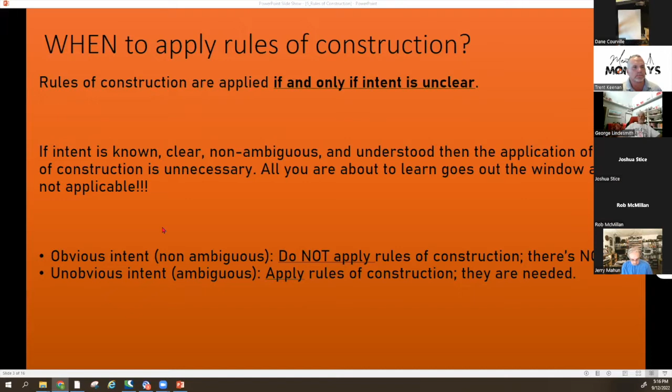Okay, so let's get into what ambiguities are. Ambiguities are something that will cloud that intent. That's what presents its ugly head whenever you're reading a deed, and you have to decipher and make your decision on what the hell they meant by that. What did they mean by John Smith's rock wall? What did they mean by Henderson Creek? Did they mean the center line of Henderson Creek? Did they mean the edge of Henderson Creek? Did they mean Henderson Creek in 1953, or Henderson Creek in 2022? There's all kinds of situations where you can second guess yourself. You don't really know the intent of that original surveyor or the landowner trying to transfer that land.

The two types of ambiguity are latent ambiguity and patent ambiguity. Patent ambiguity, the way I remember this, because I could never remember it, the letter P in patent should also jog your memory for print. So patent and print, P and P. So patent ambiguity is whenever you're reading that deed, the ambiguity is depicted right on the face of the deed. Just by reading the print of that deed, you know the ambiguity is involved.

An example of that is if you're reading metes and bounds and it says north 30 degrees, 25 seconds north, a distance of 223 feet, this is obviously not right. You cannot go north-north. You can either go northeast or northwest. Whoever wrote that deed wrote the word north twice. They should have written east or west. So now do we go north 30 degrees east or north 30 degrees west? You got to try both out, see how the deed closes, see which one makes more sense. You're trying to figure out the original intent. So that's a patent ambiguity. It's obvious, right in the print of the deed.

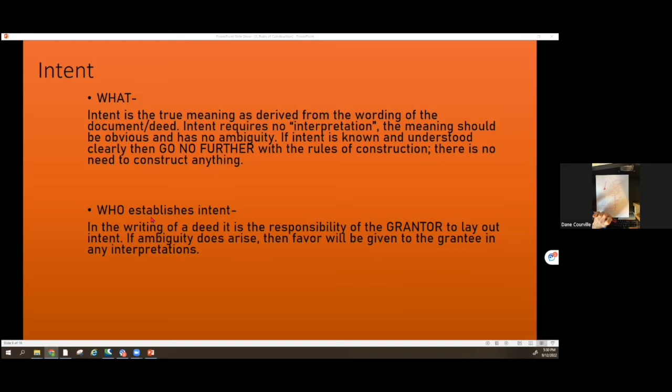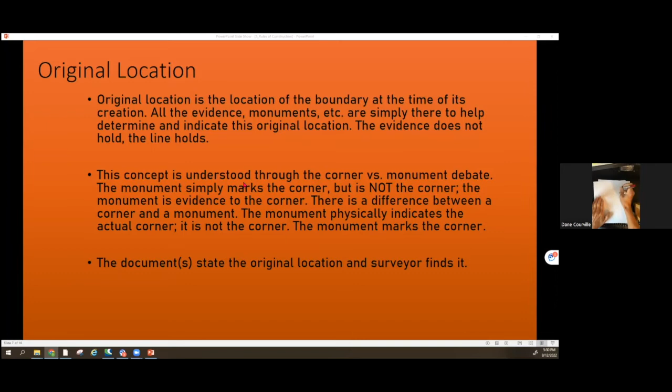Okay. All right. Original location. Original location is the location of the boundary at the time of its creation. So we have a parcel of land, big, huge ranch. Okay. And monuments were set back in 1853 by the original survey. Okay. And then over the course of time, that ranch gets divided up, sold to the heirs, all kinds of stuff's going to happen. Subdivisions are going to be made.

But at the end of the day, those original monuments that were set, they're going to dictate everything within this larger ranch. And it's going to keep getting smaller and more divided. Every time it gets divided, there's going to be a new original monument. Every time a pin is set or a piece of land is cut apart, anytime there's a new parcel involved, there's going to be some new pins put in the ground. Those pins are going to be noting a property corner. And when those corners are set, that's going to be the original location for this new parcel.

Okay. And it's your job as a surveyor to go out and build that back in. And that's what's meant by the intent. You know, the original intent was to have this large ranch and then to sell off the south 20 acres of the east 35 acres or whatever it is in the deed. Okay.

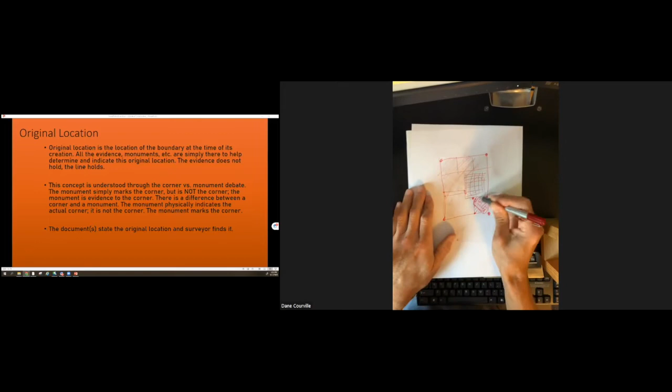Statute of frauds. So that's what the judge and the lawyers are going to lean on solely whenever they're trying to recreate the picture of how this parcel was generated. They're going to go back and look at all those written documents, whether it be map form, legal description form, whatever it may be. Okay.

But in those documents, they're searching for the intent, and the intent is going to dictate that original location. Okay. So if you go back to here, really, if you're relying on area, you're going to have to build the measurements back in to recreate that area. And to get the measurements in, you might have to go get monuments outside of where you are or something.

But at the end of the day, if you're way down here on the hierarchical list, you're going to have to build yourself all the way back up to this intent. Think of it that way. You might be down here, but you need to end up here. You need to find that original intent. All right, so intent is paramount. Then we go to original location, and you find that out by the original documents and what was intended by those surveyors and land transfers.

If you cannot find that original location, then you're going to have to start relying on the monuments. And those monuments are hopefully marking corners. And that's what we need to figure out, okay? I want to go back to this operative record. So the operative deed is that which creates the line. The monuments represent the original line. So the operative deed is going to be that deed that created a new parcel, okay? Yeah, I just wanted to make sure y'all saw that.

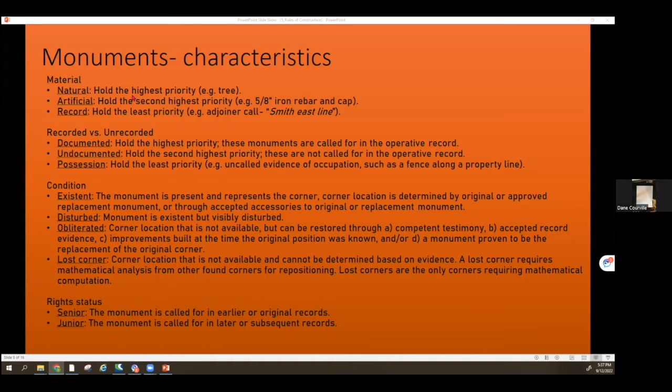Okay. I do want to say here, per the BLM manual and other books I've read, if you manipulate a natural monument, it then is degraded to become artificial. So if you hack a blaze in a tree, or if you chisel an X in a rock, if you're manipulating those natural features in any way, that boulder that you chiseled your X in now has the validity of an artificial monument. That tree that you hacked the blaze in becomes an artificial monument. So if you adjust the natural monument, it then becomes an artificial monument in validity.

Okay. I don't really know the reasoning for that. The only thing I could really think of would be, I guess they think if you're chiseling an X in a boulder, you have the potential to split it or move it in some way. If you hack a blaze into a tree, maybe you can kill it. I'm not really sure the reasoning for that, but I have read that.

Okay. Hey, Dane, there's one question in there. The old stone wall, natural or artificial monument? I would say artificial, because you've picked up those stones and you've moved them to a different location and you've placed them in a pile. That would be my assumption. And working in the state of Maine, I can tell you, everyone considers them artificial. There you go. And every single parcel has either a rock wall or a creek on it in Maine. So I've come across a lot of those.

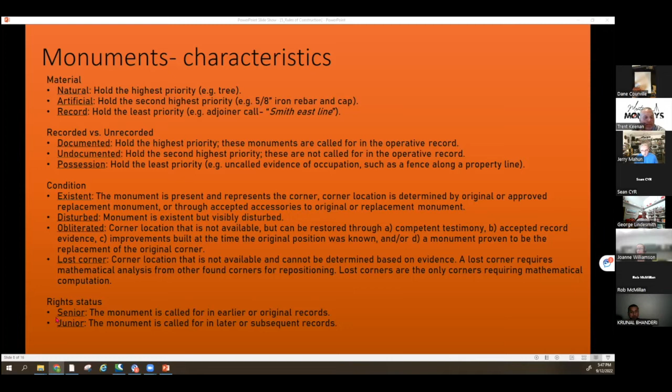So first thing you do for monument reestablishment or monument interpretation is you want to find the original monument. So you want to go find the operative deed. That's the deed that created the parcel you're working on. Okay. So the operative deed is the deed that created the tract. In that deed, it's going to call for a monument, hopefully. That's the monument that you need to go out there looking for.

If you don't find that monument, that means it's going to be a subsequent monument. Someone is trying to replace that original monument because it was lost or disturbed with a new monument. That new monument is going to be second in validity compared to the original. And if you don't see a subsequent monument, then you have to start relying on witness monuments. And those would be things like a reference tie. Okay. So paramount is original, then subsequent, and then finally reference ties or witness monuments. If no monuments are called for in the document, then they simply become supplemental evidence.

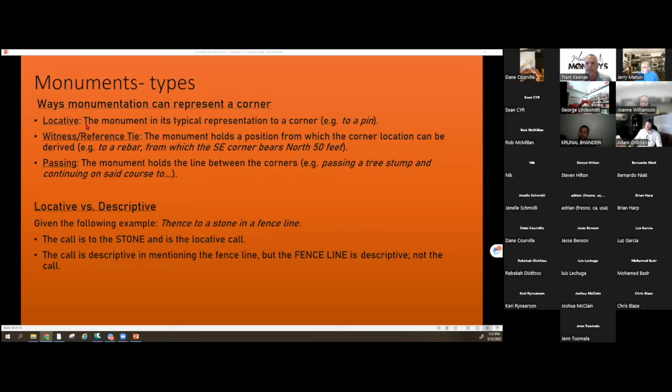So it can be useful, but they are kind of tossed aside if that original stone monument is found. Okay. So locative, passing, and then witness would be monuments over here to back that stone in. Let's say you get up here and the stone's gone, but you have three really good references. I would utilize the references before I would start using my passing calls.

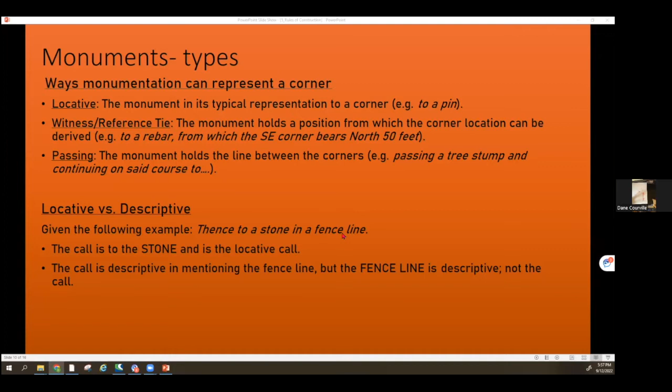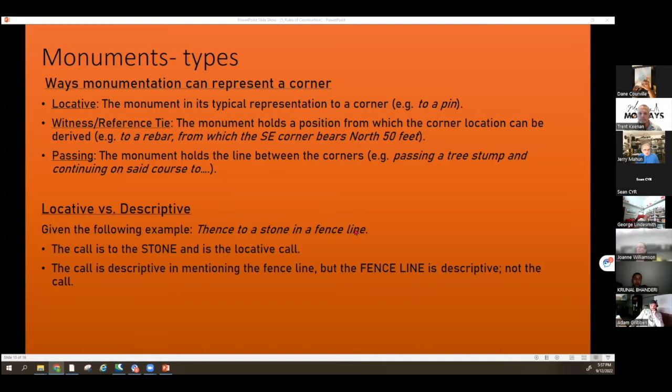Locative versus descriptive. This is a big one. I'd really like to drive this home. So let's take the situation: thence to a stone in a fence line. So you go out there and you walk a fence line for a mile. And sure enough, you're finding fence posts, and every now and then a fence goes off both sides. You're in ranch land or something, and you're finding fence posts, and you get all the way up and you find the rebar that was called for.

Actually, let's say you get all the way up there and you find a fence post right here, not the rebar. So you find a fence post, but you do not find the rebar. The deed calls for a rebar. That fence post is not the corner. Now, maybe it is. Maybe based on measurements and reference ties, someone ripped out that stone and put that fence in. It's still not going to be the corner, but it's going to indicate the corner.

But what I'm getting at is the call in this situation is the stone corner, the stone monument. It's not a fence. They throw this fence line comment in this call just to help guide you in the direction that you need to be. It's almost like a passing call at that point. So the fence is the descriptive monument. It's not the monument. It says thence to a stone. It doesn't say to a fence corner. It says to a stone. The fence is just going to be there to help you.

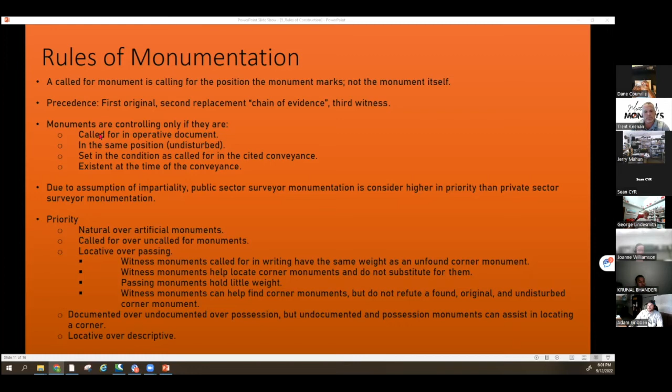it would say, thence to a 5/8 inch rebar set with blah, blah, blah, stamped on it. And then in parentheses, he would make me say to be set. Okay. So we had this beautiful description about the bearing and the distance and what was going to be there. And then he clouds it all with parentheses to be set. And I didn't know any better. That's what I was doing for a year, you know?

And this lawyer gets up there and he's like, if I see one more person tell me that their description is written before they start putting the monuments in the ground, it's totally non-valid at that point. And he's right, because now my boss's description was going to sit out there for the next 50 years, and people are going to read that and be like, well, is the monument set or not? Is the monument there or not?

And then the lawyer said, you'd just as soon be calling it a unicorn horn at that point, because it's that fictitious. It's that imaginary. So basically, if it's not in the ground when you're writing that description, I would recommend holding on to that description until it's put in the ground, or give it away and go set those monuments as fast as you can. One way or the other, but don't keep telling everyone it's not there yet, because we don't know when you're going to put it in.

Okay. Well, that's this one right here, existing at the time of the conveyance. So when they're selling that land, you would think that grantee would want the pin set when they bought it, right? And it needs to be in the condition that is cited. So you can't say a 5/8 inch rebar and it be a 1/2 inch rebar or something like that.

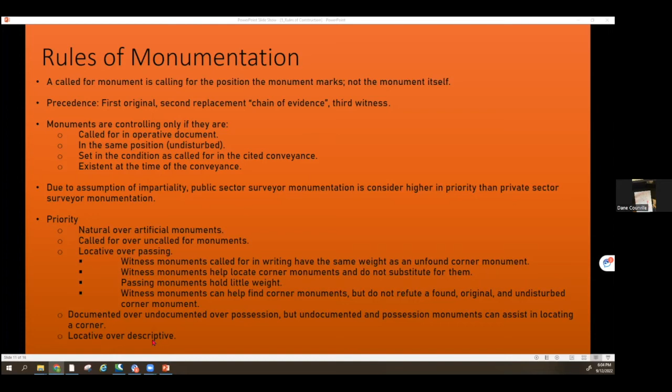And we've gone over all these: natural over artificial, called for over uncalled for, locative over passing, documented over undocumented, and locative versus descriptive. Okay. There are exceptions to everything we just talked about. Disturbed monumentation loses all or some validity. So yeah, it might be called for on the deed, but is that monument pulled out of the ground and laying on the side? Can it really be relied upon?

Monuments will not hold if the grantor's intent clearly states otherwise. So you could have a deed in front of you that's depicting everything. You go out and you find it. Okay. But you have that whole latent ambiguity thing going on. So let's say the intent was to set the monument at 1,000 feet. And that was the intent. You go out and that surveyor, he misunderstood, and he resets another monument at 100 feet.

Okay. Just because it's a called for monument in the deed doesn't mean it's always going to hold if it doesn't make sense with the whole greater picture. So you got to look at the whole description and make sure that it all makes sense with what you're finding. Just because it's called for doesn't mean that that was the intent. So this goes all the way back to what we first discussed. Is that intent clearly known?

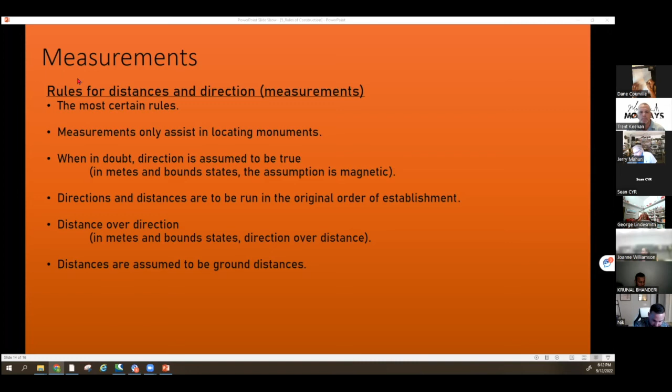And the reason he was doing that, he told me, was because of this first rule right here, most certain rules. This is the reason why whenever you write a check you have to write out in words the dollar amount, because someone can easily make a mistake and put a decimal in the wrong spot and change it from $200 to $2,000.

But if you're writing out, it's going to be a lot more cumbersome for you to write out $2,000 as opposed to $200, right? So it's a good idea to actually do that, because when the judge looks at that, he's going to be like, no, this is definitely what the guy intended, because it took him 19 characters to write out what he wanted as opposed to 3, right? So you can assume with good certainty that that's what was meant.

Measurements only assist in locating monuments. So I should change this. It should be corners. So just like the monuments don't mark a corner, measurements don't mark a corner either. Measurements are just there to get you in the right direction and the right distance to get to that corner. They're just an indicator, and they assist you in doing that. They don't make it a definite.

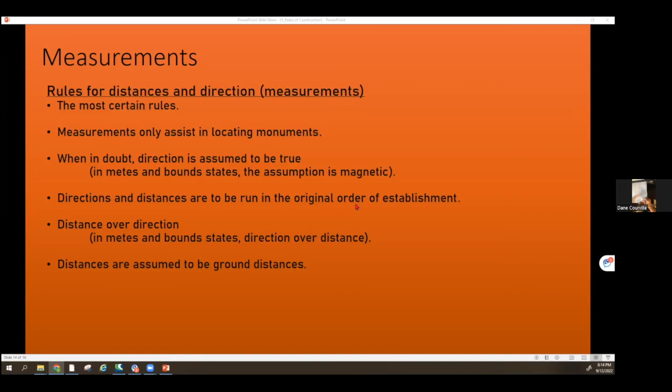Direction and distances are to be run in the original order. I hear this a lot, and it's true. You're really supposed to go, whenever you're walking those original footsteps and they call north, west, south, east, you really should walk in that counterclockwise orientation as opposed to the clockwise orientation. There might be a situation where it would be beneficial for you not to go in the direction they're telling you. Okay.

Distances hold over direction. But again, in metes and bounds, it's the opposite. So the reasoning why distance over direction in PLSS, I've heard, is because originally you had a surveyor holding the end of the chain and directing the I-man where to walk. So the I-man simply just drug a chain out there in the direction that the surveyor told him and held the chain at that distance. Or he held it taut, or she held it taut.